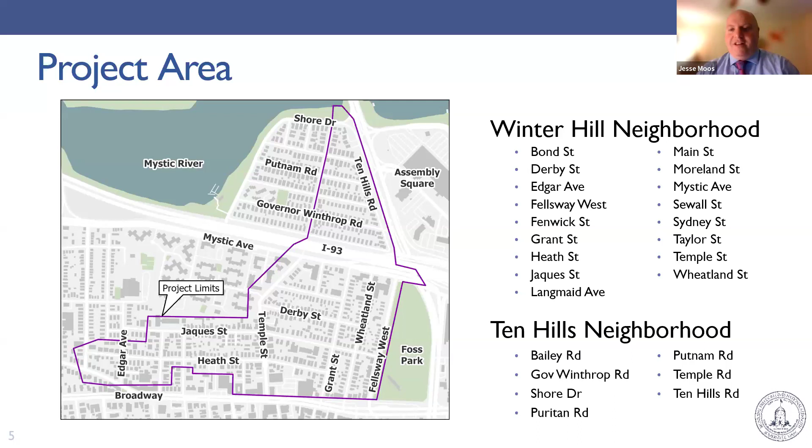All right, next slide, please. So we have a purpose of this project. As the council were talking about, goal number one is to mitigate known flooding. This is an area known to have issues, and we are here today to figure out a long-term plan. Number two, we want to improve the water quality in the Mystic River and deal with any CSO issues, and then upgrading existing infrastructure, which is not just water and sewer, but also streets and green stormwater infrastructure, which we're going to learn about a little bit later.

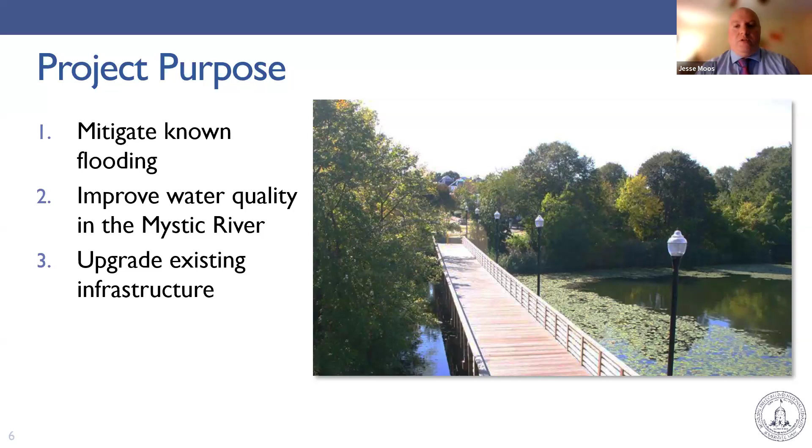Next slide, please. And with that, I'm going to turn it over to our project manager, Gina. Thanks, Jesse, and thank you all for attending this call. We'll go into more of the details later, but as Jesse mentioned, this is a multi-year project that's only just begun. We brought Stantec and Dewberry on board in the fall of 2023, and we're currently in the middle of our preliminary design process. We anticipate that will take about a year, which will bring us to fall 2024.

We'll then complete our final design process and tentatively hope to begin construction around 2026. But as Jesse mentioned, as we'll discuss as we go through this project, there's a lot to be done before then. So right now, we're in preliminary design.

What are we doing to do preliminary design? We are performing initial field investigations. We're really building out what the scope of this project will be. Jesse mentioned some of the players and folks that we'll need to coordinate with on this project, and that will be a significant part of this project because there are so many players involved. We have DOT because of 93, we have DCR because of some of the public spaces that we'll be crossing through, we have Conservation Commission, we have DEP and EPA. It's going to be a big coordinated effort on this project.

And of course, talking to our fellow players that are in the industry, but we want to hear from you all as well. So we'll be soliciting public feedback as we are right now throughout preliminary design, and we'll talk about some more opportunities later on in this presentation. And we're going to continue that as design progresses.

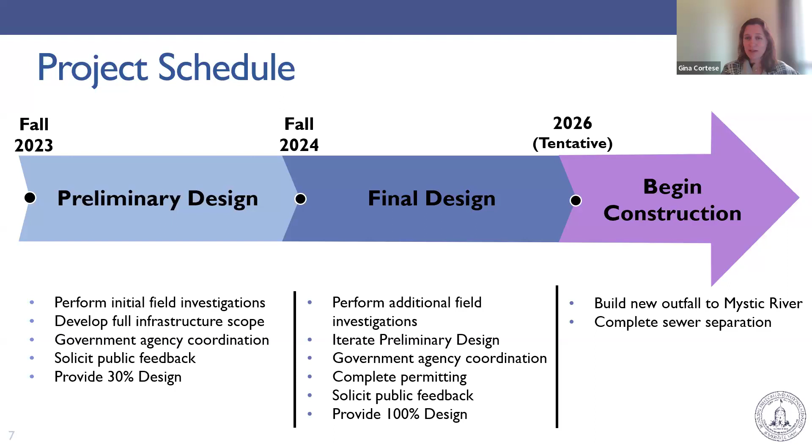So when we talk about project-specific goals, I want to first start off again with that master plan. I apologize that it's a little bit small on this slide, but we wanted to include the entire city. You can see where in that water quality master plan, flood mitigation and water quality master plan, I'll refer to it as master plan moving forward.

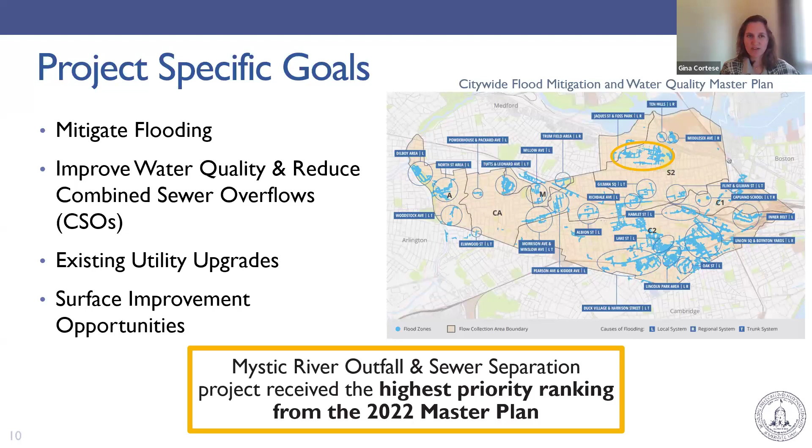So let's dig into these project goals a little bit more. Mitigate flooding. We heard it from the counselors. We've heard it from you folks and residents in this project area as we were putting together the master plan. We know that there is flooding in these neighborhoods, and we know that it's because of multiple causes. So some of those might be a little bit more obvious than others. We know water has a tendency to run downhill.

And then there are also some causes that might not be as obvious to the naked eye. Things like undersized pipes that are below ground, or a lack of catch basins to gather the water in the first place. So I won't go into too much more detail or talk about the real numbers of the flooding that we know exists here, but I would encourage anybody who wants to learn more, in addition to reaching out to us, please do visit the master plan. There's a link on this presentation, which will be posted to our website. There's a link on the project website.

Councillor Clingan, when you're mentioning websites and stuff, is there a feedback section where people who are in those flood zones can give feedback and vent about exactly what they're experiencing when they're experiencing it? Is there any type of feedback page on that website?

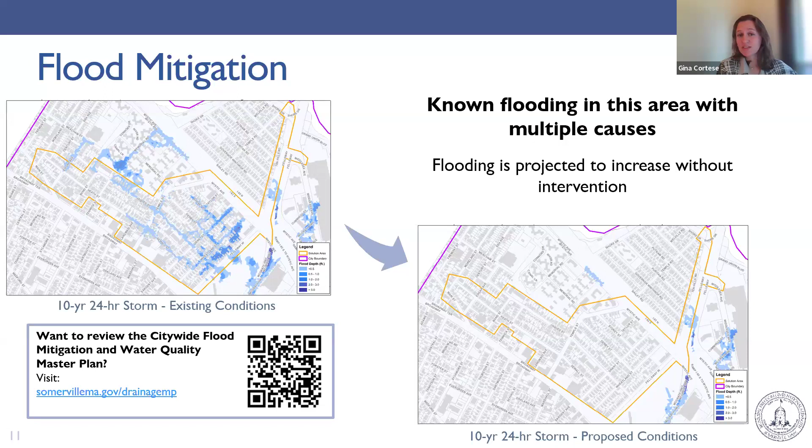But flood mitigation is a high priority with this project. We know that without the interventions we're proposing, flooding is only going to continue and increase as storms get worse throughout the years. So flood mitigation is a big one. Another one is water quality improvements and CSO reductions.

What's CSO? It's combined sewer overflows. What's a combined sewer overflow? What's a combined sewer? The city of Somerville, like many older cities in this country, has what's called a combined sewer system. That means there's essentially one set of pipes for the whole city. So when it rains, any rainwater caught in a catch basin goes into the exact same pipe that your sanitary sewer goes to when you flush your toilets or run a shower. Anything that's water being wasted from the city goes through the same set of pipes.

In dry weather conditions, it's not usually a huge problem. All of that mixes together, goes to Deer Island, and is treated by the MWRA. In heavy rain events, in the heaviest of rain events, that storm water and that sanitary sewer mix. If it's a small rain event, they mix, get sent to Deer Island, and all get treated.

But if it's a really heavy rain event, we run out of space in our pipes. So two things happen. One, the stormwater has nowhere to go, and we experience flooding because there's nowhere for the stormwater to drain out. You might see that on the streets or in your basements, but the water has to go somewhere, and it can't fit into the pipes.

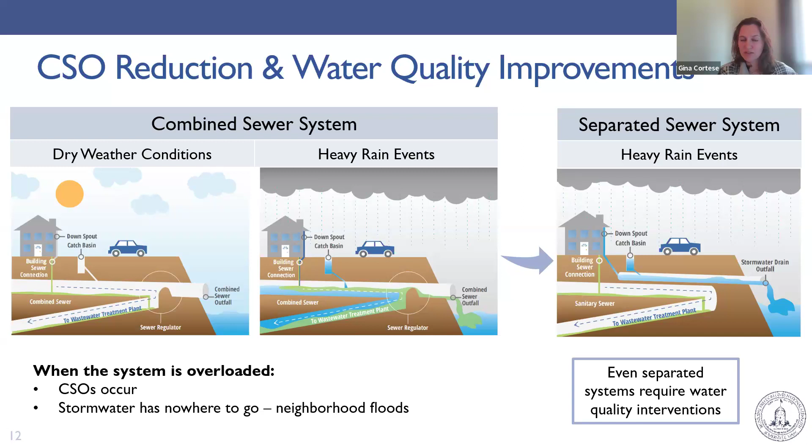Even when we separate our stormwater from our sanitary sewer, we still require water quality interventions. It's not pristine water—if it rains and you catch it in a bucket, it picks up some of the contaminants from the street. So the rainwater we're picking up off the street will need water quality interventions before it meets the Mystic River. That's something we're hoping to achieve with this project.

We talked about the two heavy hitter goals in this project, flood mitigation and water quality improvements, but there are others. We mentioned existing utility upgrades, and that's not just sewer and stormwater systems—it's things like water as well, our fire pull boxes, and third-party utilities like gas mains.

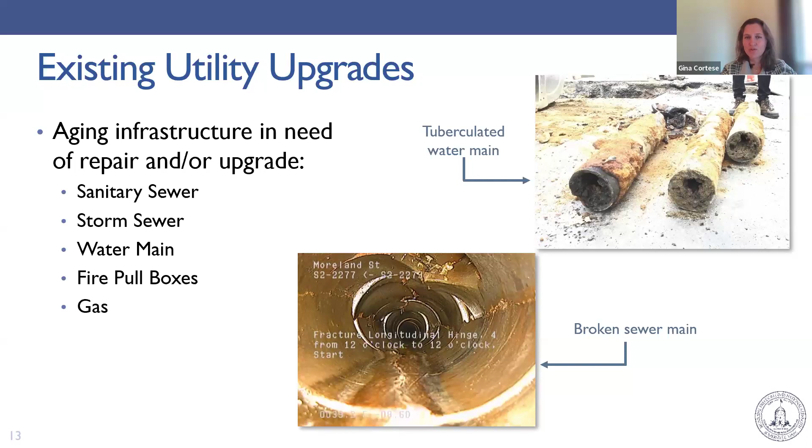Then the last goal, similar to taking advantage of the opportunity to fix existing infrastructure below ground, we want to take the opportunity to fix the surface level infrastructure as well. Anytime we're doing underground utility work, it's going to require street level restoration. That might just mean repaving a street, but it's also an opportunity for us to evaluate the alternatives available for how we use our street space, and to prioritize safer street designs.

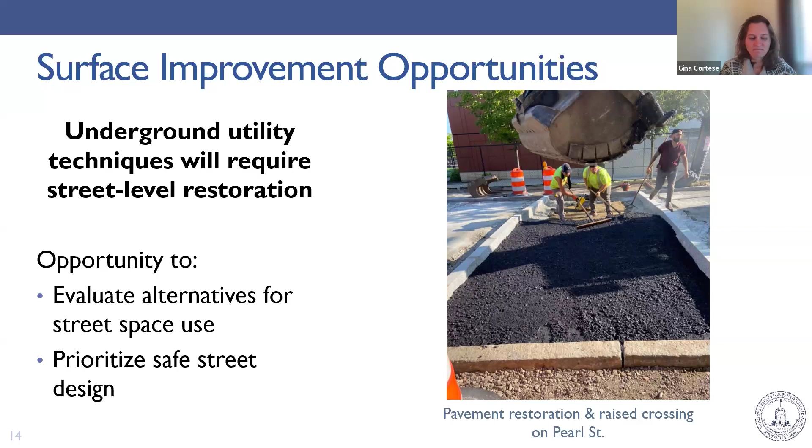So those were our project goals, what we're hoping to achieve, but how are we going to get there? Thinking again about those two major project goals, flood mitigation and water quality improvements, here's a whole bunch of opportunities and options in our toolbox to achieve those goals. A lot of these tools have been used on projects that are nearly complete or underway in other parts of the city.

We're going to evaluate just about all of them for this project, because you can't just pick one tool and expect it to achieve all of the goals we want. It really needs to be a holistic approach. As we go through the next couple of slides, we'll talk through some of the benefits and drawbacks of most of these tools for us.

We're going to start with sewer separation and new outfall, the namesake of this project, and really the two biggest tools in our arsenal to achieve our goals.

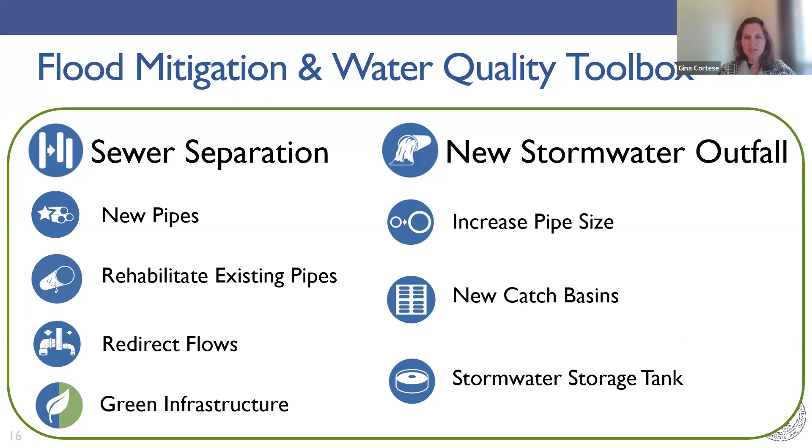We talked about what a combined sewer is, and the benefits of why we are moving towards sewer separation in this project. Simply put, it's adding in a whole other set of pipes to take all of our rainwater and stormwater and direct it separately away from our combined sewer. This is our most effective option for flood mitigation. It takes water off the street, it creates capacity in our sanitary sewer which otherwise had to share space with rainwater, and it reduces and eliminates CSOs, which improves public health and the health of our water bodies.

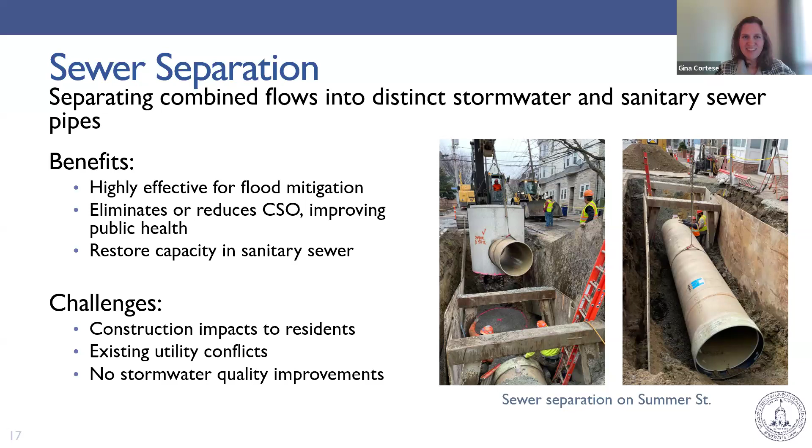That's sewer separation. Now think about a new stormwater outfall—you really can't have one without the other in this case. Building a new stormwater outfall is inherent to sewer separation in these neighborhoods, because you can do all the work to separate the sewers and create new pipes to direct stormwater from the streets, but it has to go somewhere. For it to get to the river, we need an outfall to do that. Combined with sewer separation, it's our most effective tool for achieving flood mitigation and reducing CSOs, and the outfall component is necessary to achieve the sewer separation we're seeking here.

I will add, as you might imagine, there are additional coordination efforts needed to put an outfall in. There will certainly be a more significant permitting effort, but these are all things we are working on in our design to make most efficient.

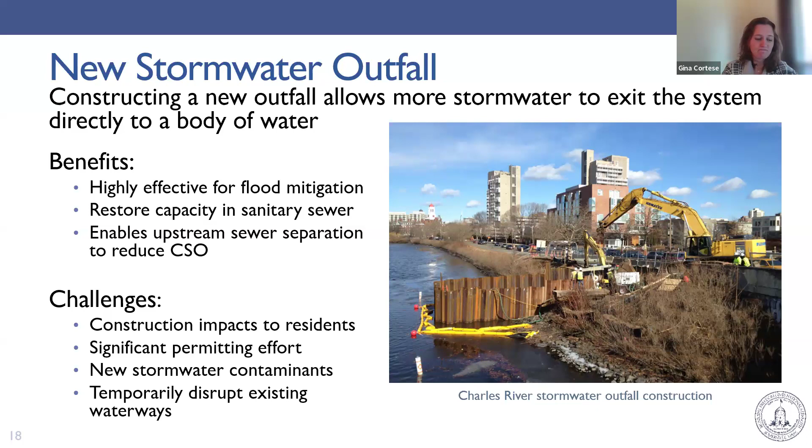So those are the big two, and certainly the most significant efforts in the project. But there are other relatively easy solutions that we're going to want to implement as well.

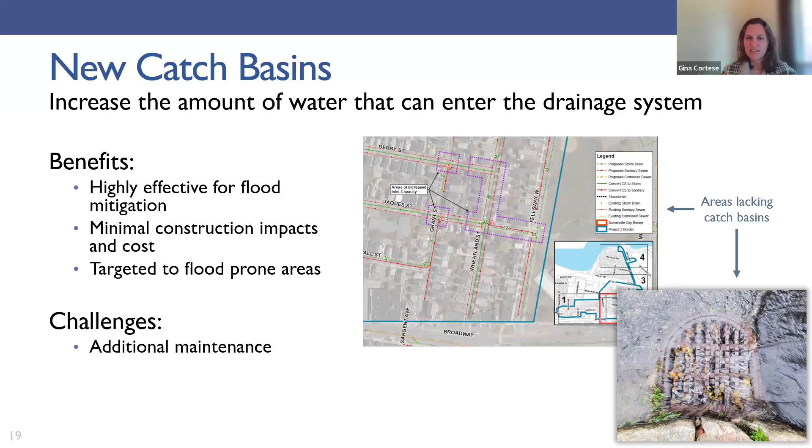One of those is installing new catch basins in the neighborhood. This main picture here is from the water quality and flood mitigation master plan, and it shows areas where we've identified that we simply don't have enough catch basins. So when it rains, the pipes are big enough, but the inlets to the pipes are not. All it takes is adding a couple extra catch basins to clear that water off the street faster. We've identified those areas, making this highly effective for mitigating flooding in pinpointed areas we already know about, and one of the easiest tools to implement in our toolbox.

Another option we'll continue to investigate through our design phases is increasing pipe sizes. This one's a little easier in that we have existing pipe, we know where it is, and we know there are bottlenecks where the existing pipe sizes are maybe too small. When the pipes are too small, backups happen upstream of those pipes. So all it takes is increasing the size of that pipe, which increases storage capacity and the ability to convey water away from areas that are otherwise flooding quickly. We're able to target those known bottlenecks simply by increasing pipe size, and it's easier to construct because we know exactly where the pipe is going and it already has a home, since a pipe exists there already.

Similar to that, we'll be adding new pipes in areas where pipes don't already exist, adding storage capacity and another way to remove water from roads and get it into our system sooner.

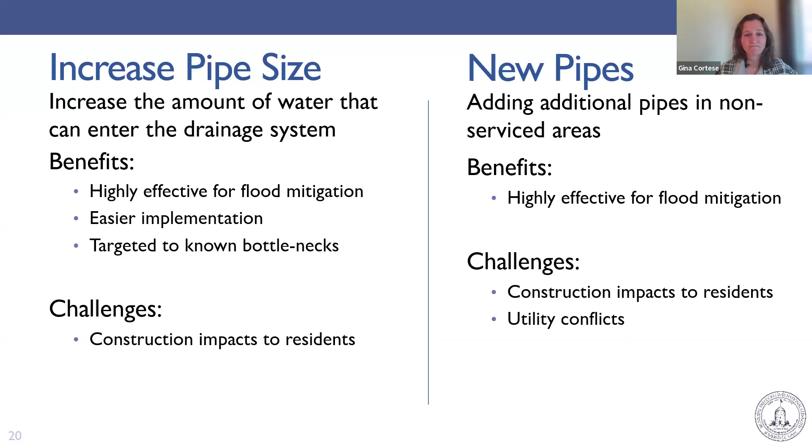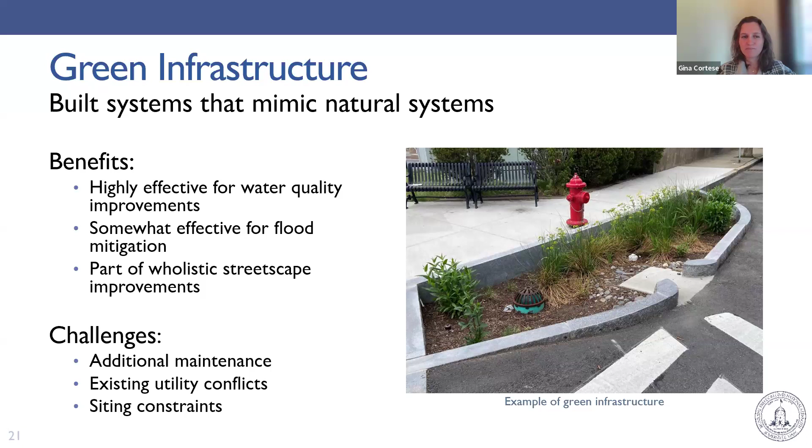So what is green infrastructure? You may have seen this in the Spring Hill project or on Somerville Ave, projects we've completed, like a bioretention basin or a stormwater tree trench, where you really see that visual of what green infrastructure looks like. But there are plenty of other options beyond what's shown here, like permeable pavement, where if you didn't look closely you'd think it's just pavement, but it's providing additional hydraulic benefit to the area. Same with a subsurface infiltration trench, which looks like a sidewalk but is doing a lot of work under the surface that you don't see.

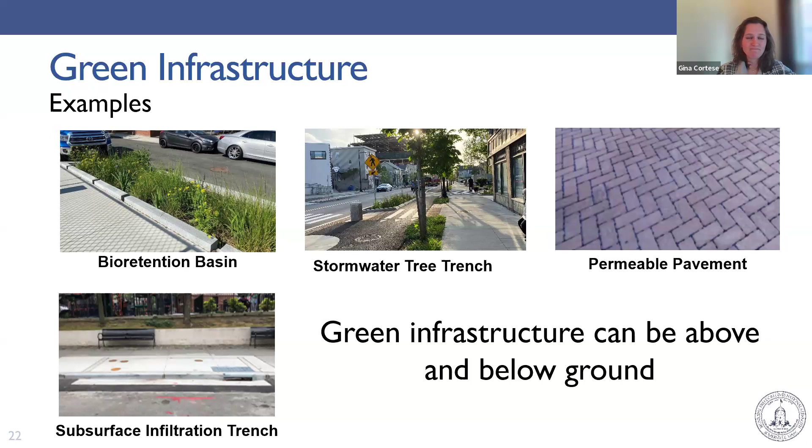I talked about the additional benefits of green infrastructure, but there's more than just the hydraulic benefits and water quality improvements. Visually and aesthetically, it's nice to look at with this new greenery. You're increasing the tree canopy in Somerville, which is a known goal for the city. You have the opportunity to install native plants, and you develop urban cooling. So green infrastructure has additional benefits when you think of it through the lens of a holistic streetscape improvement.

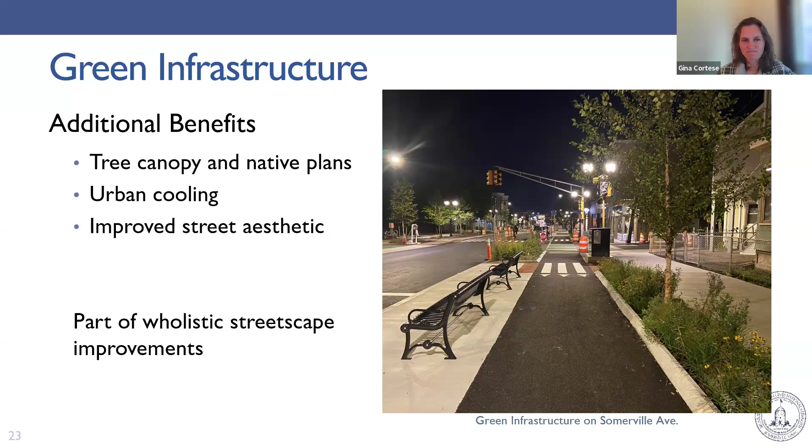So those were our tools for flood mitigation and water quality improvements. We've also talked about our need and desire to repair and replace existing utilities. We know there are a lot of older utilities in Somerville that have done an amazing job so far. They've functioned well beyond their expected lifespan, but it's time we have the opportunity to make some improvements.

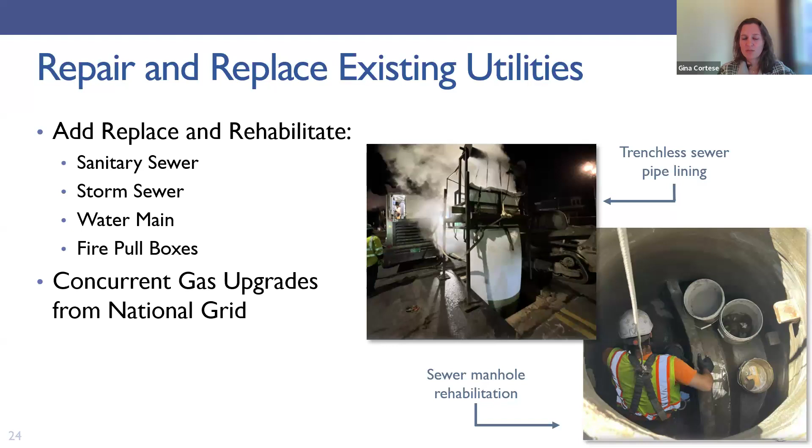I'll also note that we've already been able to coordinate with National Grid, and we're working with them to make sure they're able to provide gas upgrades in this neighborhood as well, concurrent to this project.

That was for existing utilities below grade. We want to think about utilities and surface improvements we're able to make above grade as well. You've seen these interventions on other projects in the city, and we're going to look at them with this project too—things like speed humps, mid-block or raised crosswalks, and adding curb extensions.

But the main goal we're asking ourselves as a design team while moving forward with this design and thinking about streetscapes is: how can we make our neighborhoods safer? We have the opportunity with this project to take a swing at some of the streets in these project areas, and we want to take advantage of that.

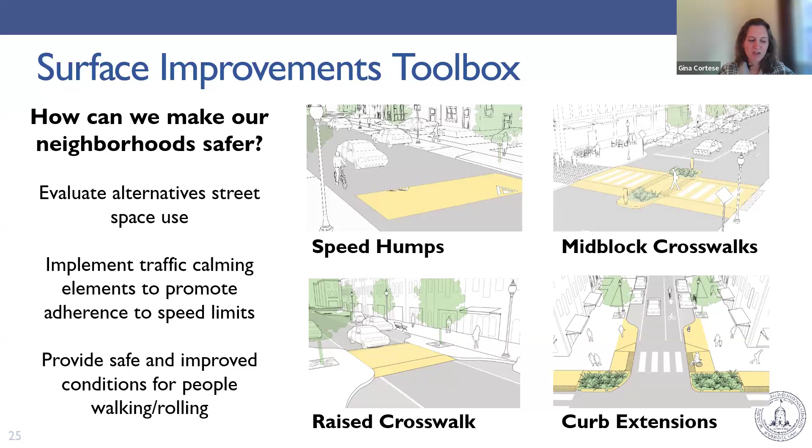Again, that's evaluating alternatives to how we use our street space, and really doing our best to improve the safe passageway of all road users in this project area. So those are the tools—that's how we're going to create this project as it moves forward.

Where are we now? What are our next steps? You're at our community meeting—we want to hear from you.

The next opportunity to speak with us directly in person is at the mayor's event. Mayor Ballantyne has started a spring meetup series called Slice of the City for each ward. On Thursday, May 2nd, from 5 to 7, several of us from the city and other departments will be at the Healey School playground to talk through projects, not just this one, but the state of the ward. You can come talk to us, like an open house, and grab a slice of pizza.

We'll also be having an in-person workshop in June of 2024, and we'll hold the next community meeting like this one in September, after we've progressed further on the design.

Please do visit our project website, linked on this page with a QR code. You can stay up to date with design progress, get updates on community outreach events, and sign up for email alerts.

We're also available directly—you see my, Jesse's, and Nick's contact information. If you have further questions about this project, please reach out. Visit our project website; we want to hear from you.